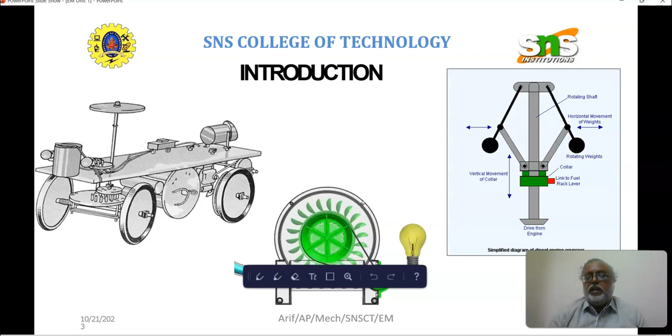Let us discuss about the basics of engineering mechanics. In engineering mechanics, the applications are just shown. These are few applications in which the mechanisms are used. In all these three kind of mechanisms, we are using engineering mechanics. To deal with the above situation, we need to know about the engineering mechanics.

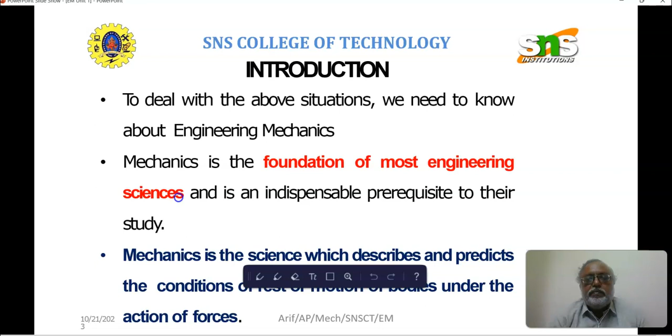Mechanics is the foundation of most engineering sciences and is an indispensable prerequisite to their study. Mechanics is the science which describes and predicts the conditions of rest or motion of bodies under the action of forces. So, engineering mechanics deals with mechanics of solids as well as the mechanics of fluids.

The mechanics of solid is further classified as mechanics of rigid bodies as well as the mechanics of deformable bodies. Mechanics of rigid bodies is further classified as statics and dynamics. Dynamics is further classified as kinematics and kinetics. The deformable body mechanics is defined as the theory of elasticity as well as the theory of plasticity. Similarly, the mechanics of fluid is classified further into ideal fluid, viscous fluid as well as incompressible fluid.

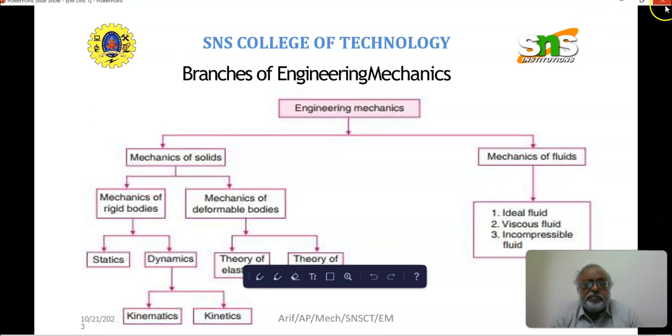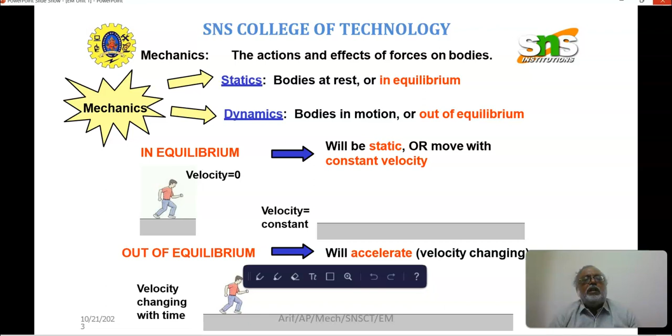Here, the engineering mechanics is basically about the kinetics, statics as well as the dynamics. Statics is the body at rest, and the dynamics is a body in motion. The dynamics can be further classified as kinematics as well as the kinetics. Kinematics is the study of motion without referring the forces. For example, the relation between the position, velocity, acceleration and time comes under the kinematics.

Kinetics is the relation between the unbalanced forces. It means we are considering the forces, that is changes in motion. In the kinematics, we can say how fast, how far, and how long it takes. But in the kinetics, the forces involved to produce the motion will be considered in the form of weight or the aerodynamic drag.

There are some 6 fundamental concepts of mechanics. First one is the space. Space is associated with the motion or the position of a point which is given in terms of 3 coordinates measured from a reference point or the origin. The second one is the time. Time is the definition of an event which requires specification of time and position at which it is occurred.

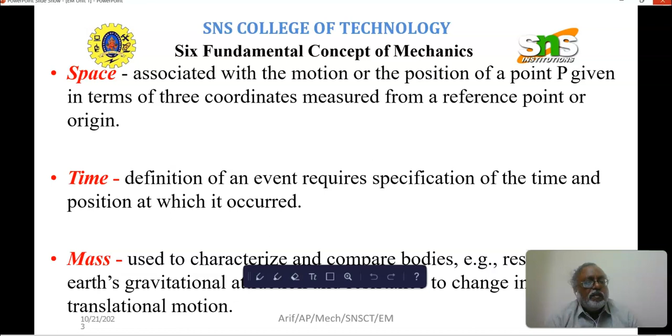Mass is a character which is used for comparing the bodies. Example, response to the Earth's gravitational force. And the fourth one is the force. Force is a push or it is a pull. An object at rest needs a force to get in motion. That is, moving object needs a force to change its velocity.

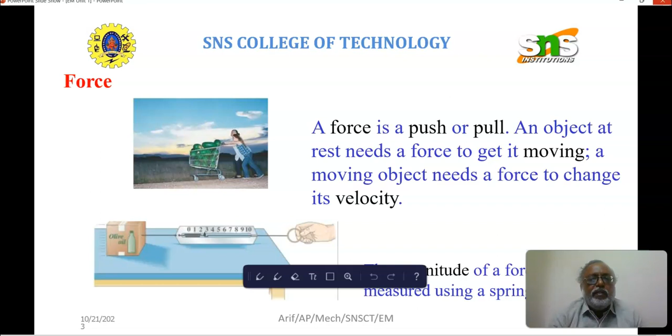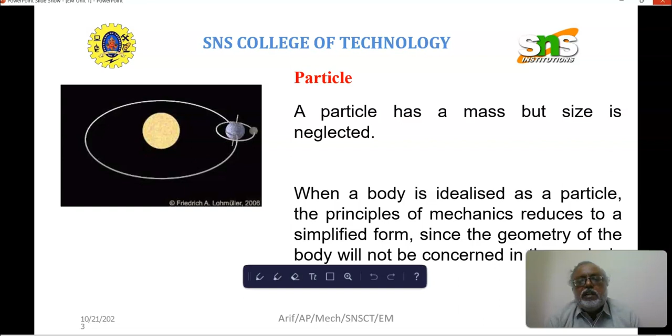The fifth one is a particle. Particle has a mass but size is neglected. When a body is idealized as a particle, the principles of mechanics reduce to simplified form, since the geometry of the body will not be considered and it is not concerned in the analysis. The last one is the rigid body.

Rigid body is a combination of large number of particles in which all the particles remain at a fixed distance from one another before and after the application of load. Here the mass and size of the bodies are considered when analyzing the forces. So let us discuss about the remaining forces and their analysis in the next classes.